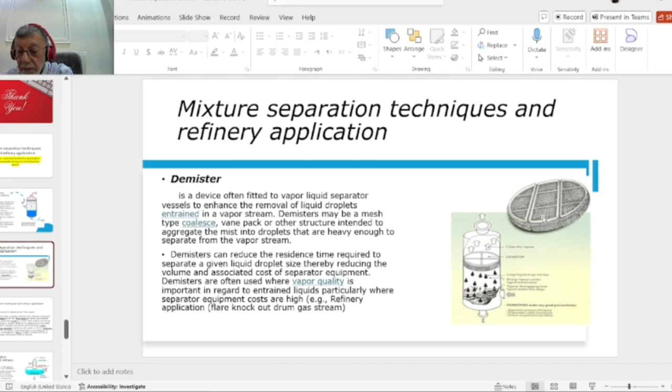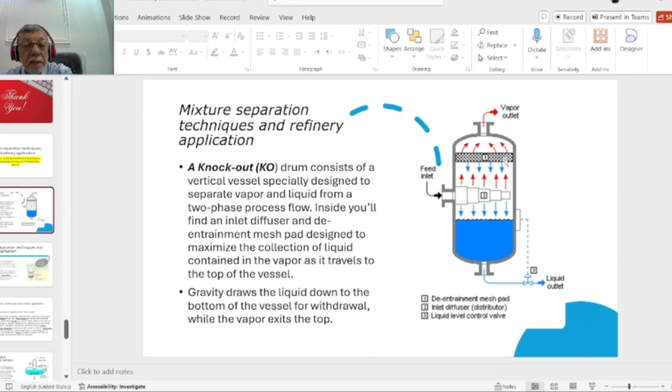So this is the demister. A demister is a device used to catch liquid droplets from any gas or two-phase mixture and return them by weight to the liquid phase. It is used in knockout drums or any two-phase or three-phase separator in the vapor line to catch droplets. It is mesh wire or another type.

The other method is deaeration. Deaeration is the process of removing dissolved gases in water, boiler feed water. Boiler feed water is treated water, but after all the treatment steps there are still dissolved gases, oxygen and carbon dioxide. Oxygen and carbon dioxide are very dangerous when sent to the boiler.

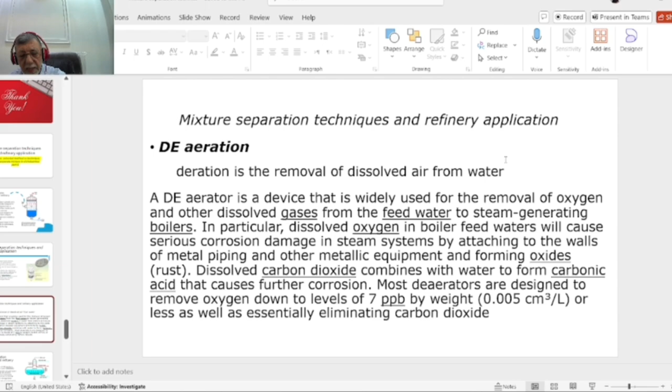At high temperature, oxygen reacts with iron, with carbon steel or stainless steel, and makes ferric or ferrous oxide, and this is corrosion. Also CO2, carbon dioxide, reacts with water and makes carbonic acid, an acid that attacks the metal and causes corrosion in the boiler.

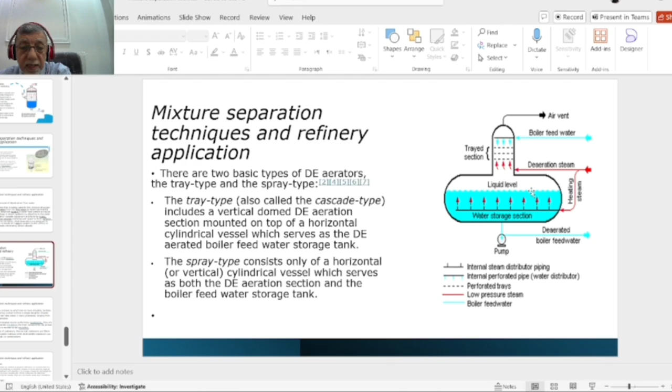So this is the water sent to the boiler as feed water, and here is the vent, this is vented to atmosphere, and there is a valve here. The valve always has to be open all the time. Otherwise, there is a reaction, and all the carbon dioxide converts to carbonic acid in this space. So this is the deaeration technique.

The other technique for separation is coalescence. Coalescence is a process in which two or more droplets, bubbles or particles merge during contact to form a single daughter droplet.

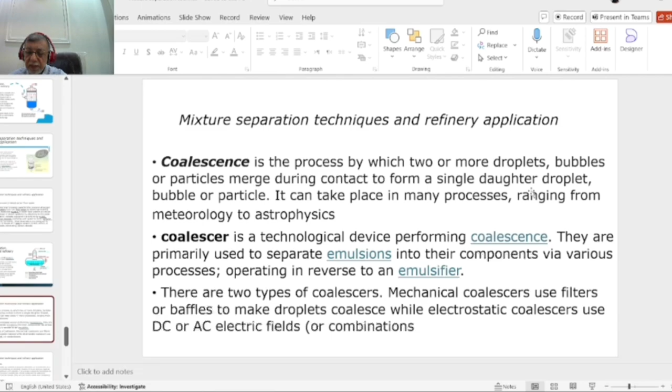It is in emulsion form. So when they touch or contact each other, they become one daughter droplet, a big droplet. And this particle then goes down and the oil goes up. So a coalescer is the device in which this process is done. And this is, of course, for emulsions.

And there are two types of coalescer: the mechanical coalescer and the electrostatic coalescer. The mechanical coalescer operates by physical involvement of droplets, influenced by mechanical or physical means. The more common type, mechanical coalescers, are applied in the oil and gas industry worldwide to function as separator tools for liquids.

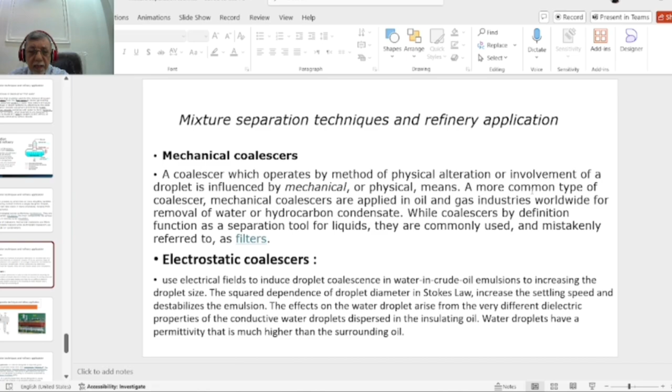So the last method is the treating of wastewater in the refinery. Wastewater in a refinery is contaminated by oil and solid particles or sludge. So in refineries, petrochemical plants, natural gas processing plants, any plant, there is a wastewater system to separate or treat the water before disposal. So this is called API because it is designed according to the American Petroleum Institute standard.

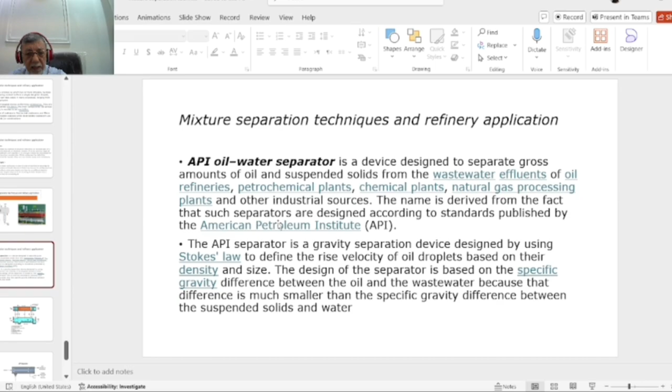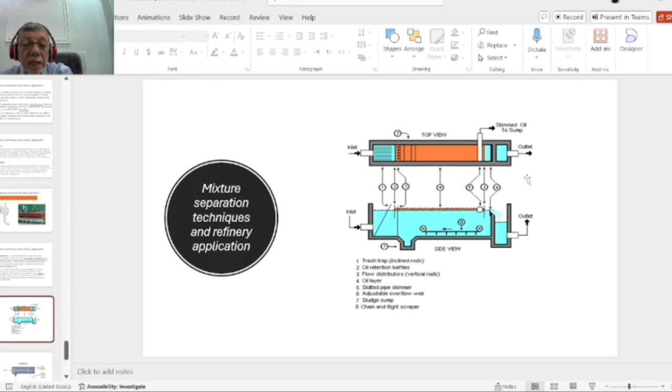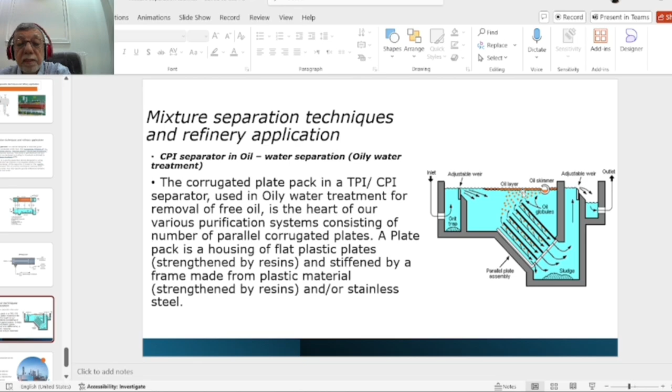There are also the CPI and TPI, tilted plate interceptor and corrugated plate interceptor. This is the corrugated plate. When the contaminated water comes here, the oil droplet is first absorbed by this plate, and after becoming a big droplet, it goes up because it is less dense than water, and makes this layer, and this layer is later skimmed and sent to the slop tanks, the wet slop tank, because there are two slop tanks, the dry slop tank and the wet slop tank.